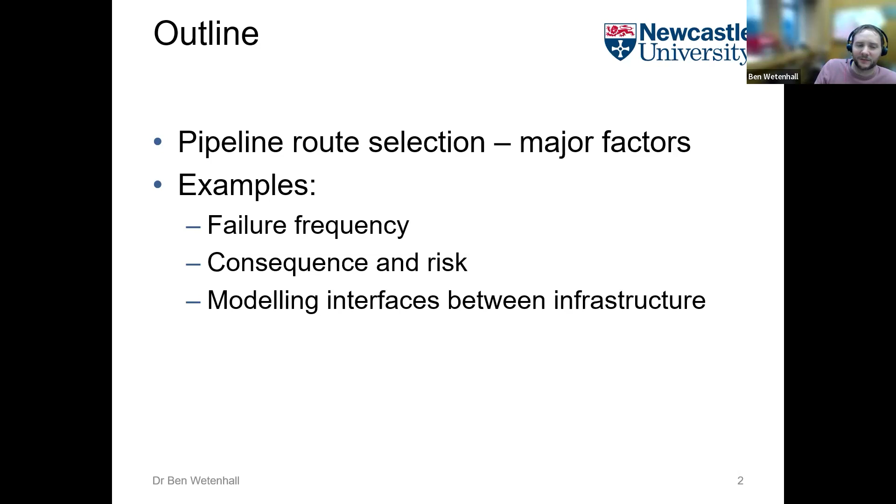Right, so I was asked to talk about spatial considerations of hydrogen and carbon dioxide pipelines. And my interpretation of that is basically, where do you put your pipeline? How do you route your pipeline? So I'm going to talk about a few things. I'm going to talk in general a little bit about how you choose a pipeline route, how you select your pipeline route. I'm going to talk about some of the major factors that you need to think about. And then I'm going to give some examples of some of our work that goes into pipeline route selection. So I'm going to talk a little bit about failure frequency of pipelines, a bit about risk and consequence, trying to prevent things going wrong. And then I'm going to talk about something that's been hinted about already, about interfaces between infrastructure - how do we model those and how do we include them? And lastly, I'm going to end with what I think are the challenges and the opportunities in this area.

Okay, so how do we choose a pipeline route? What are the major factors? Well, these are some of the major factors that go into overall pipeline system design. So you need to know where your supply and demand points are - where your hydrogen is being produced, where your CO2 is being produced, where your hydrogen is required, where your CO2 store is, for example. And you've got to include build-up points as well. So maybe you're collecting hydrogen en route on the way, maybe you need to store it on the way, maybe you need to store your CO2 partly along the way.

Another major important thing is what the fluid is and your fluid properties. So maybe you're dealing with 100% pure hydrogen, maybe you're dealing with 100% pure CO2. A lot of the times you're not, and this has a major effect on the fluid properties. You're dealing with different phases - you may be in the gaseous phase, you may be in the liquid phase - and different conditions as well, so maybe you've got different flow rates, different pressures, different temperatures.

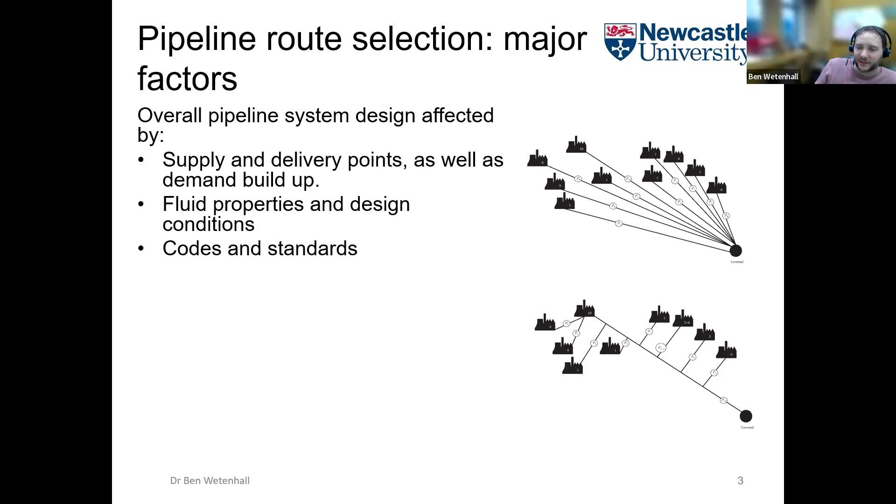When you're making a route, you need to make sure you comply with all your legal frameworks. So you need to make sure you build to code and to standard, so everything's safe and legal.

When you're building a pipeline, obviously the quickest way is just in a straight line. However, things aren't always so easy. You've got to really consider what's on the route, the topography, access. So you've got to think about things like river crossings, if you can jump in with energy corridors, mountain passes, or if you're passing close to heavily populated areas. You've got to consider all those things in a very detailed way.

Also have to consider the environmental impact on the way, which depends a lot on where you're going. It's very case specific, but you have to consider the environmental impact of building a pipeline.

You have to make sure you've considered integrity and also pipeline protection as well. So maybe you need some kind of coating of the pipeline. You maybe need to bury your pipeline, and also how you're going to manage risk as well.

And last but not least, economics. So a lot of things go into the cost of this. The major cost of a pipeline is generally the capital cost, mostly made up of the pipeline material and the installation. However, you've also got to include your facilities along the way, so things like compressors or pumps.

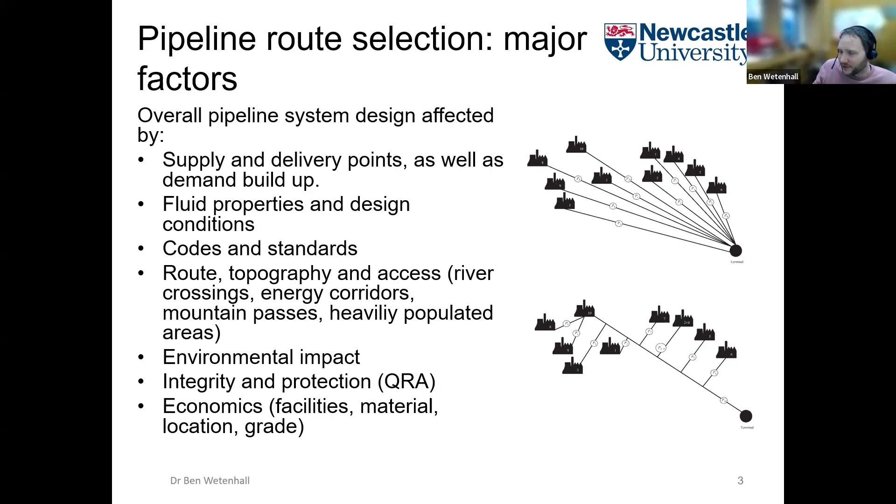So I'm going to talk about some examples of what you need to include in this, the kind of models. My first example, I'm going to talk about failure frequency, and I'm going to talk about carbon dioxide pipelines because that's what I've been working on mostly.

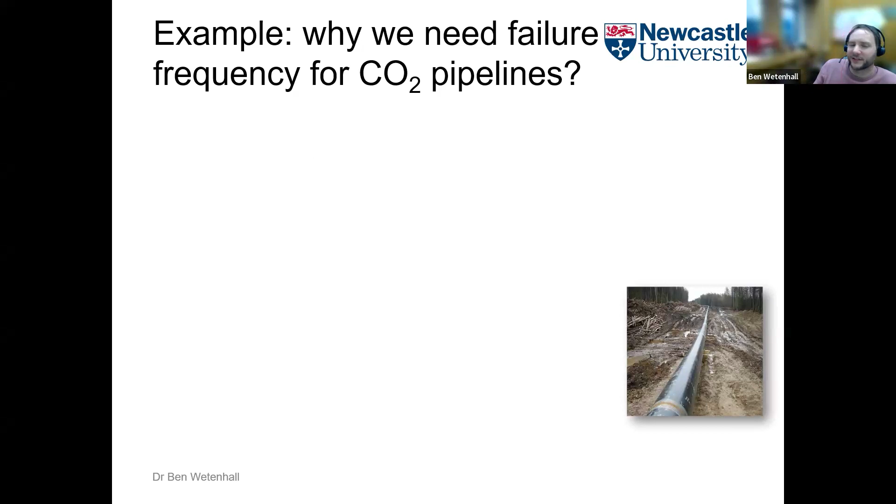So first of all, why do we need to consider failure frequency for carbon dioxide pipelines? Well, carbon dioxide is a hazardous substance, it's toxic in high concentrations and can also be an asphyxiant. And if in the unlikely event there was an accidental release from a pipeline, you could have quite a large inventory released, and if people were there, it could cause them harm.

In the UK, the pipelines could be routed quite close to densely populated areas, just because we are quite a densely populated country. And we need to understand the risk. So to get the risk, we need to know how likely we are to get failure, which is where the failure frequency comes in. And we also need to know the consequence of failure as well.

CO2 is quite different to natural gas. Natural gas is explosive, it's flammable. CO2 isn't explosive or flammable. The risk considerations are quite different for CO2 pipelines when compared to natural gas or even hydrogen pipelines. So you need to consider them quite differently.

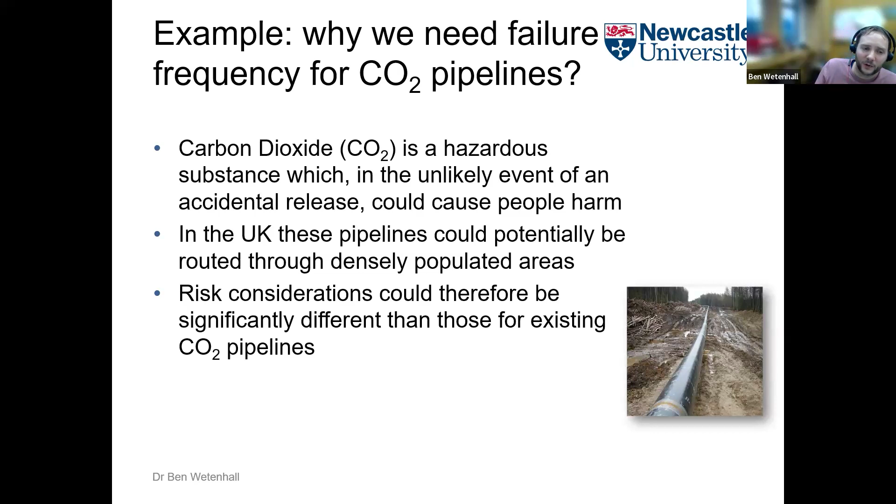And you're going to need a QRA, a quantitative risk assessment approach. So as part of your QRA, you're going to need to know your failure frequency. So we focused on looking at what's called third-party failure frequency, which is the most common for oil and gas pipelines in the UK.

What does third-party mean? Well, that means that something other than the operator comes and hits your pipeline. So it could be a farmer digging in a field, for example. So something other than the operator is the third party, and this is quite a common method of failure for pipelines.

There are failure frequency models that exist in industry, and there's no reason why these can't be used for carbon dioxide or hydrogen pipelines too. They're just pipelines, right? Pipelines are pipeline. So how do these models work? They use semi-empirical failure equations, and they use historical damage data about previous accidents as well.

Now, what about CO2 pipelines? The thing about CO2 pipelines is they're most efficient to transport in what's called the dense phase, so a dense liquid. And this typically means that you're going to need high wall thickness pipe, so you're going to need quite thick pipe.

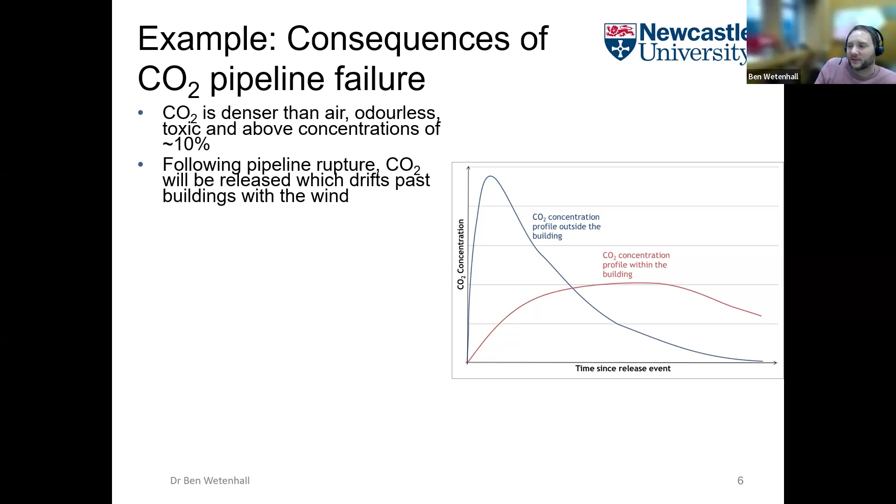So one of our projects was looking at how CO2 could pass from outside into a building. How much risk exposure would there be to people in buildings? We need to be able to calculate CO2 concentrations in buildings as part of a QRA.

If you see this plot on the right, a cloud of CO2 can pass the building. We've got concentration against time. The blue line is the CO2 concentration outside the building. If that was constant outside, eventually the building would reach the same concentration as outside, if it was there for long enough.

In reality, the CO2 cloud is going to pass the building, but still some CO2 is going to go from outside to inside, and we need to know how much. So my blue line here is how much is outside the building, and my red line is how much passes into the building from outside.

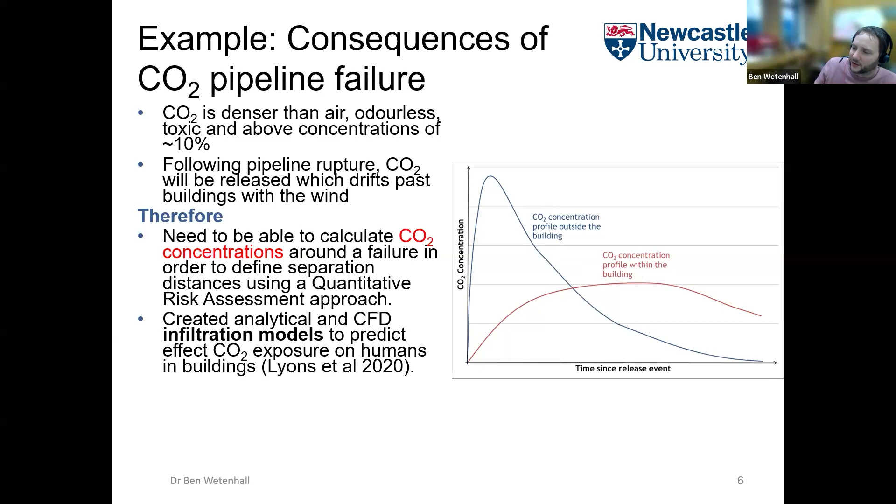So you can work out the consequences. We created two kinds of models that can tell you this: an analytical model and a CFD infiltration model, and you can use those to predict the effect of CO2 exposure on humans inside buildings. I'll put the link on the slide as well if you're interested in the publication.

How does the model work? I'll just briefly go through it. It's described in the paper, but basically it considers wind and buoyancy driven airflow. So if the wind is incident on a building, it's going to push the CO2 into the building if the CO2 is sitting outside.

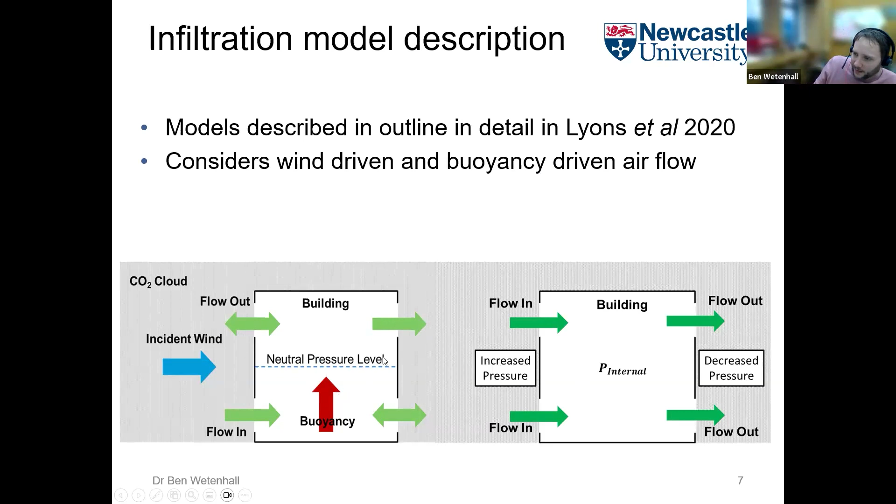Also, there's going to be flow inside the building because of buoyancy. The CO2 is quite cold in general, and that will affect the flow inside the building. Depending on the pressures and the temperatures, that will affect the flow. So we've considered that and the wind.

The model produces just a single concentration inside the building. One important thing is we needed it to be computationally efficient, because if you've got quite a long pipeline route, you're going to have to perform risk assessments in quite a large area. I think this is a theme for a lot of these geospatial considerations - because you're dealing with large areas, you need the models to be very computationally efficient.

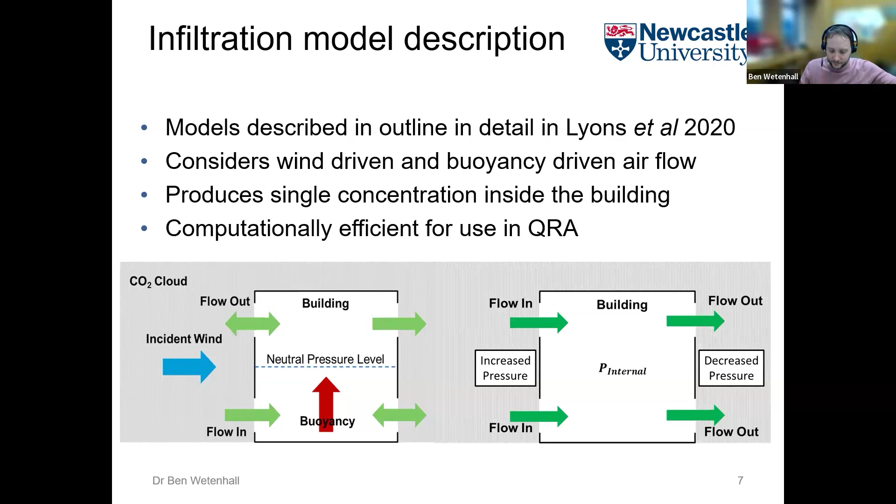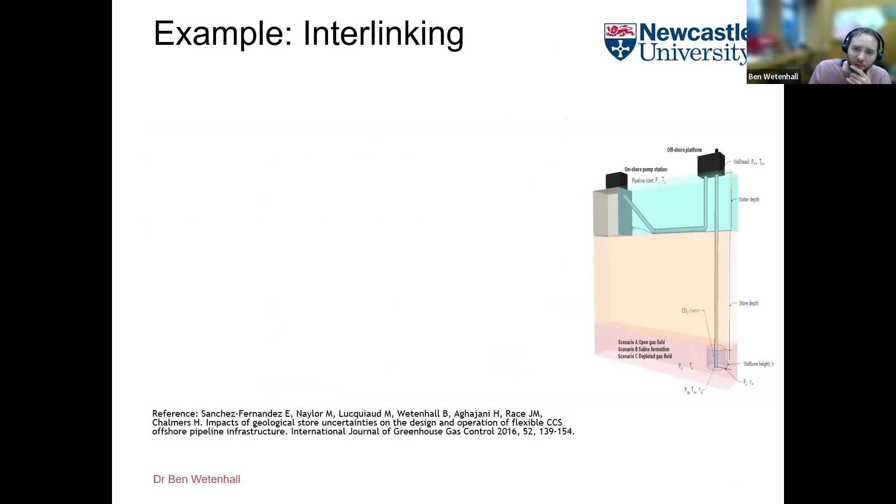Okay, another example I want to talk about is interlinking between models and interlinking between different parts in the system. When you design a system, you need it to work together with other systems. What do I mean by that? In blue hydrogen production, you've got your carbon capture and your hydrogen production, and they need to work together in harmony.

For green hydrogen, that has to work in harmony with renewable energy to produce hydrogen. So different systems have to work together, and this is going to propagate outwards into full systems, and it can be quite complicated.

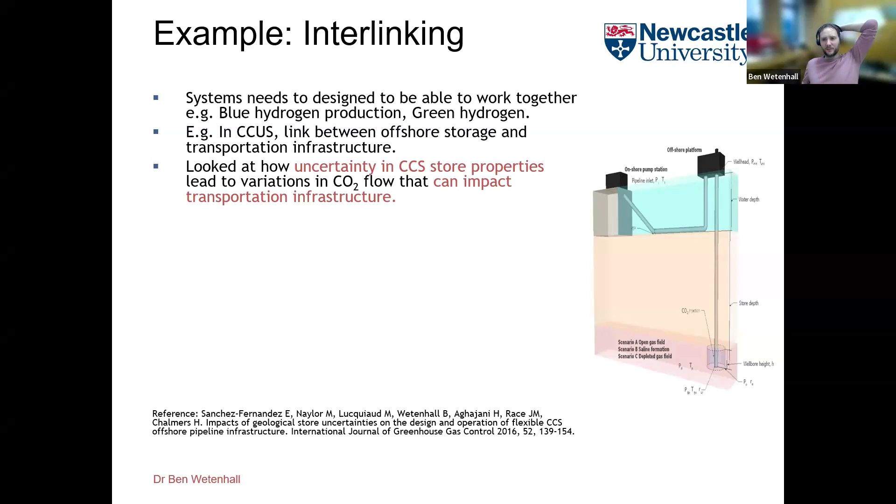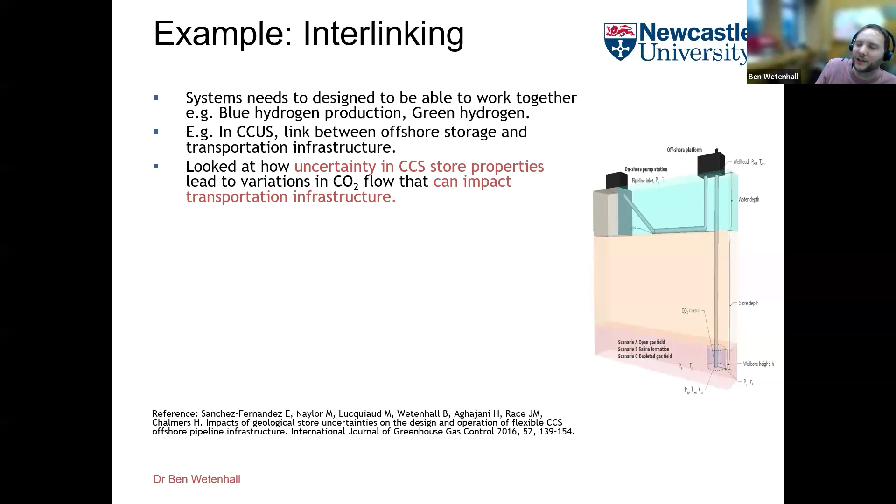One of the examples we looked at in carbon capture and storage is the link between offshore storage and pipeline infrastructure. We looked at how uncertainty in CCS store properties, things like pressure, temperature, depth, and permeability, can affect store properties, because maybe you think you know what your store is going to be like, but in reality it might be a little bit different, or a lot different. You're just doing it from your best guess.

These uncertainties can affect your transportation infrastructure, because they can lead to variations in injectivity and permeability, which means that maybe you can't have the CO2 flow that you were anticipating, which in turn affects your transportation infrastructure.

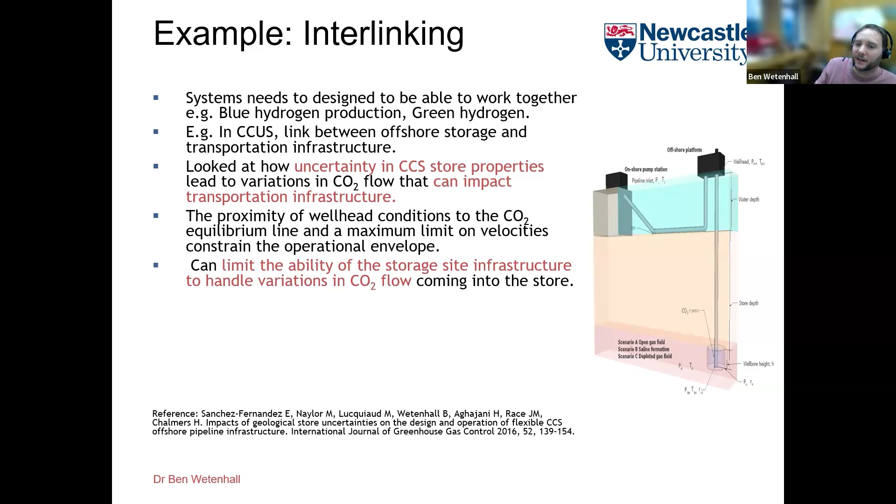Also, a lot of the time at your wellhead, the conditions that you're operating at, the pressure and temperature conditions, means that you're quite close to your equilibrium line, and also the maximum limit on velocities. And that can constrain your operating envelope as well.

So this can limit the ability of your storage site infrastructure to handle these variations coming into the store. And if the store's affected like that, if the flow of CO2 is affected like that, then that is going to affect your design of your pipeline.

Oh, sorry, I don't know why it's flicking on. It's doing it itself. My internet connection is okay, but my slides are misbehaving.

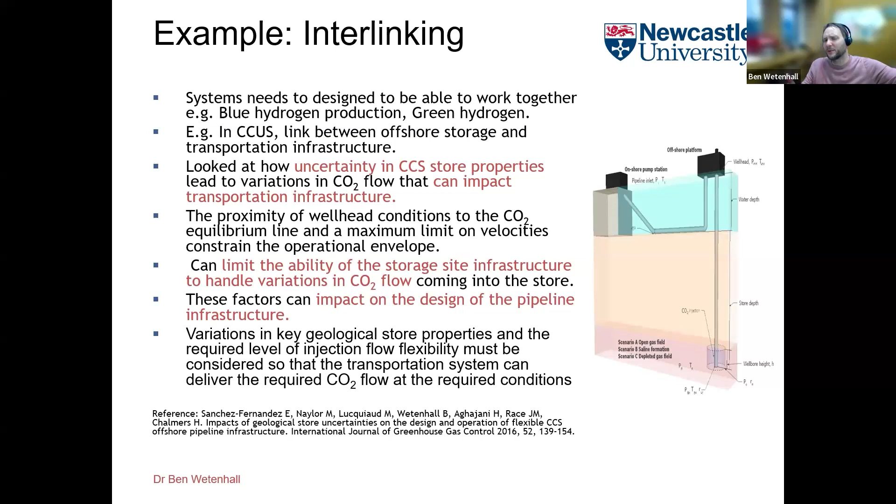So that can affect your design of pipeline. You need to include that in your design of the pipeline. Variations in store properties basically affect the level of injection that you can be and how flexible you can be. And you need to design these into your transportation system so that it can handle the CO2 flow at different conditions and probably be more flexible than you were designing to.

Another example of what I've called interlinking. You can use a pipeline to temporarily store your fluid in. It's called line packing. During line packing, the flow out of the pipeline is stopped by closing or throttling a valve downstream, while still allowing your fluid to flow into the pipeline. As a result, the fluid in the pipeline is compressed and the pipeline can be used as temporary storage.

It's called line packing. The amount of this line packing is limited by the maximum operating pressure of the pipeline as well, which you can't exceed. Line packing is used a lot in the natural gas industry, and you can imagine it allows your system to be quite flexible. So it's good to have a nice amount of line packing time.

The level of flexibility for the pipeline to act as short-term storage is very useful when you're looking at systems design. So whether it's CCUS or hydrogen, the amount of fluid that you can temporarily store in pipelines is useful for dealing with things. If you need to switch things off downline or upstream, you can use the pipeline as a temporary store.

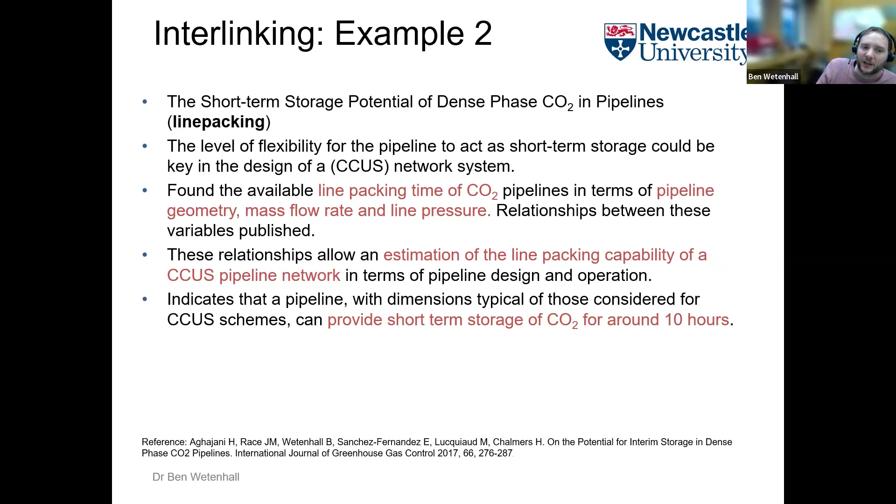So we've published relations between these variables, and the relations allow you to estimate the line packing capability of carbon dioxide pipelines. You could do the same for hydrogen in terms of your pipeline design and operation as well. For typical dense phase CO2 pipelines for carbon capture and storage schemes, pipelines can act as a store for your CO2 for about 10 hours at a time. That's what we found.

So like I was saying before, this line packing time, you can use it as short-term storage in the network, full systems. And you should think about that when you're designing your network as well, because it can really help how your system works together, including when you're reusing infrastructure as well.

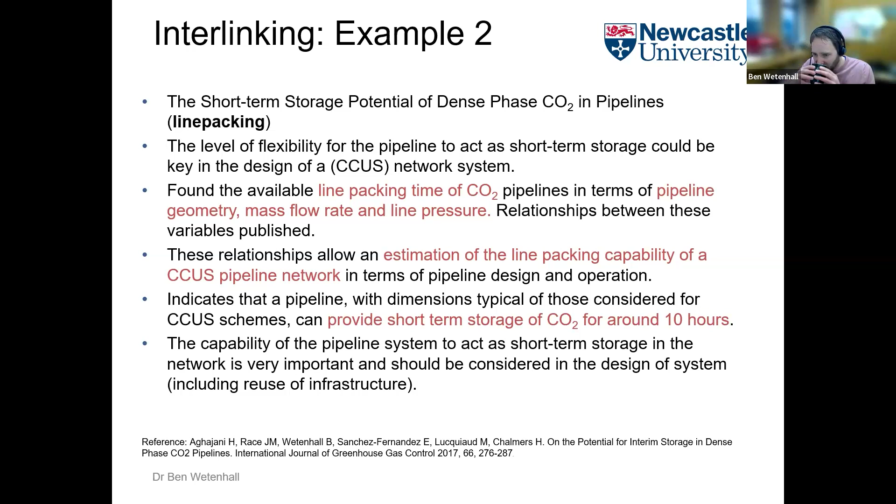Okay, so lastly, I just wanted to talk quickly about challenges and opportunities in the area.

So when you look at your pipeline route, so when you look at your spatial considerations for hydrogen or CO2 pipelines, whatever, it's essential so that you get an optimized design, so that you get a safe design, that you minimize environmental impact and enhance overall efficiency, and you make the best economic case that you can.

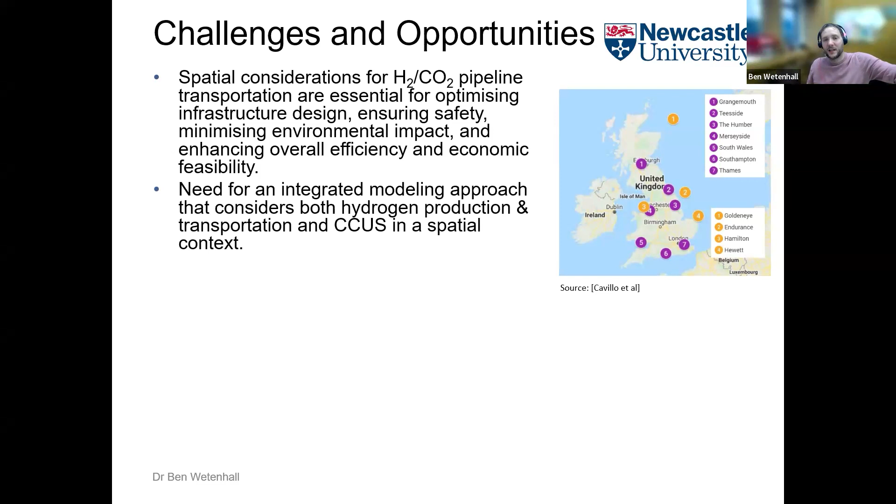You need to think about integrated modeling because these systems will work together and the effects will propagate outwards into the full system. So you need an integrated approach that considers both hydrogen production and transportation, as well as carbon capture and storage in a spatial context.

Consider the whole system and how systems work together. So, for instance, if you've got green hydrogen production, you also need to consider integration with renewable energy. You need to consider what's going to be available in terms of infrastructure and water resources, for example. So lots of different things to think about, but you need to think about how everything can work together to get the best design.

When you're designing quite a large amount of infrastructure that's complex, you generally need your models to be quite computationally efficient, because you can't wait forever for your design. They need to be quite quick.

I had to put AI in because it's very cool. But anyway, what I was thinking about for this - when you're routing a pipeline, a lot of it is looking traditionally at maps, looking at where your river crossings are, where your mountains are, how is it best to avoid them, is it better to go further from densely populated areas? So a lot of data goes in.

to making these routes, and a lot of detailed work, and there probably is potential for using AI there as some kind of quicker and smarter way of doing pipeline routing. So I definitely think that's an opportunity for the future.

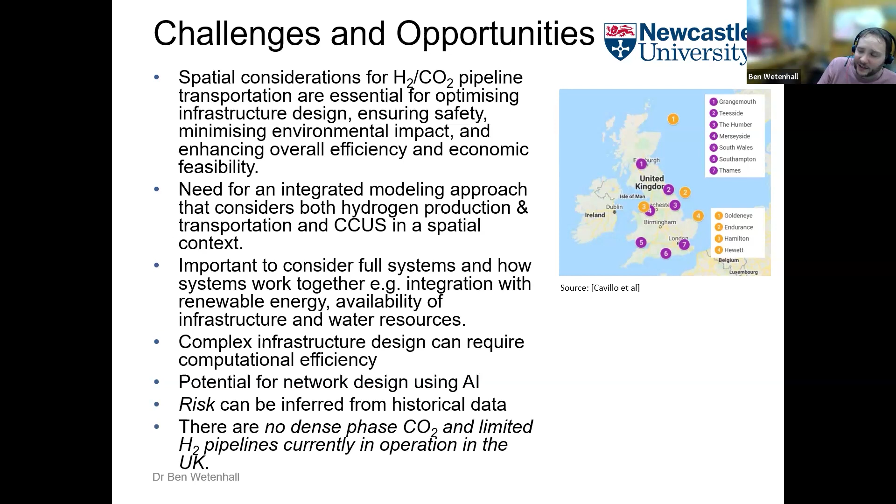Risk, well, risk is generally inferred from historical data. The thing is, there are no dense phase CO2 pipelines running in the UK, and there's very limited hydrogen pipelines. So getting that risk assessment is quite difficult as well. So you need to think about how that's best done.

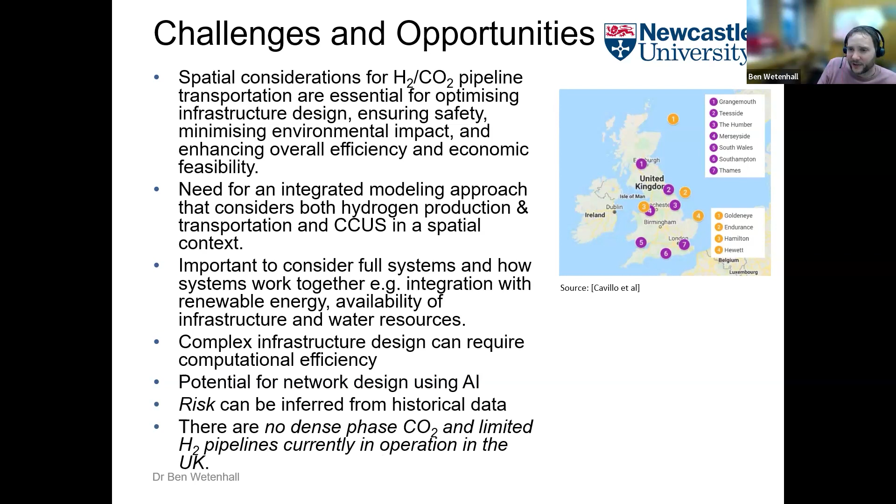And that's everything for me. Thank you.

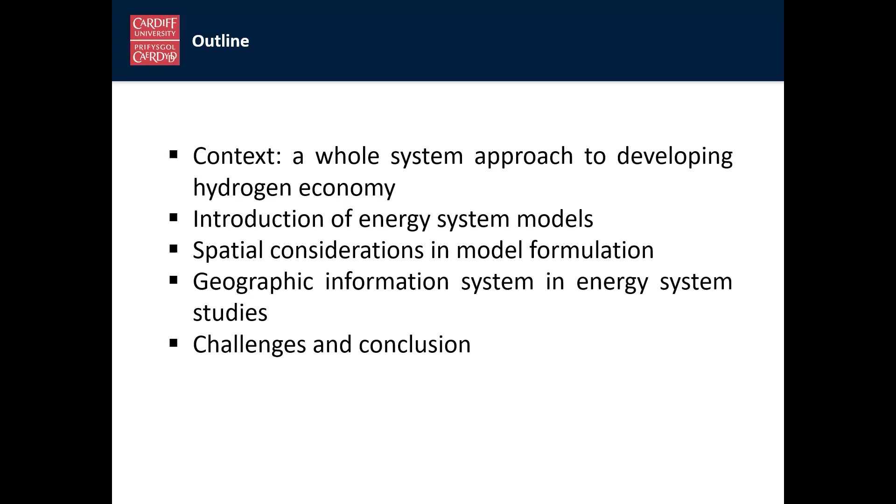So, outline for this presentation - I'm not really sure how many audience members come from the field of energy system models, so I'm going to give a little bit of context. Then there will be an introduction about energy system models and spatial considerations. So why do we need energy system models to study hydrogen?

This can be thought about in two parts. From the technical aspect, hydrogen itself interacts with other sectors through different hydrogen technologies. For example, there are water electrolyzers connecting electricity and hydrogen. There are also different hydrogen-powered vehicles and trains, maritime applications, and also applications in aviation to connect hydrogen with the transport sector.

So if we are thinking about hydrogen, we naturally come to think about what hydrogen is doing in other sectors as well. And from a political or strategy aspect, there is something called a whole system approach to developing hydrogen economy.

The UK hydrogen strategy released in 2021 - you can find that there is a hydrogen economy 2020s roadmap in the file, and it shows the gradual scale-up of the hydrogen economy with power sectors, industry, and heating as well.

And further, last December, a decision on the framework for the future system operator's centralized strategic network plan - this is a long name - has also put hydrogen production into the consideration of strategic planning, and hydrogen transportation and storage will also be considered after 2026.

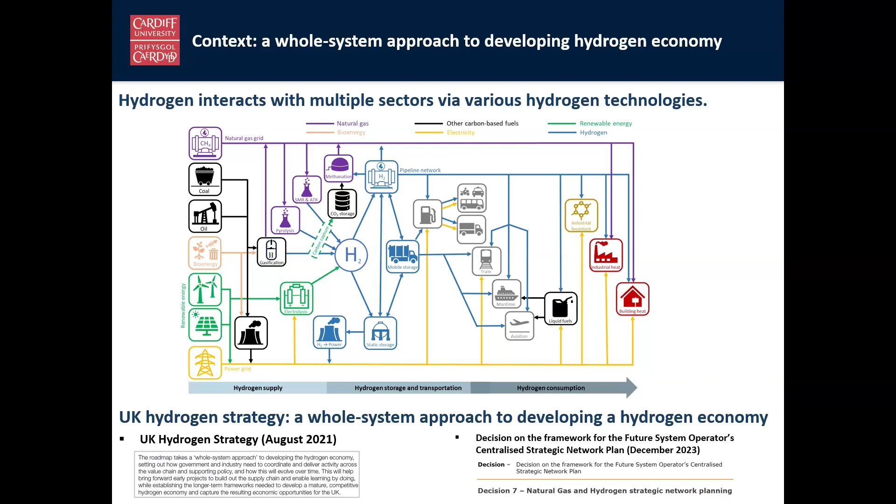So something about energy system models. When we try to study energy system models or hydrogen's role in energy system models, we need some tools to give us insights, understanding, calculations, and analysis, and that is what energy system models are here for. Energy system models, in my understanding, are different types of mathematical models that can describe the operation, physical constraints, and technical limitations of each component inside the energy systems, and also reflect the interactions between different sectors.

So the elements or components can include energy sources, conversion, storage facilities, transportation and distribution networks, energy consumers, etc. However, there are also different inputs and outputs.

These can be very different according to the different research questions or study objects of these energy system models. But the most popular ones include energy supply and demand, technical, economic, environmental factors of performance of technologies, and also social and environmental implications, as well as development plans, system design, and operation schedule, etc.

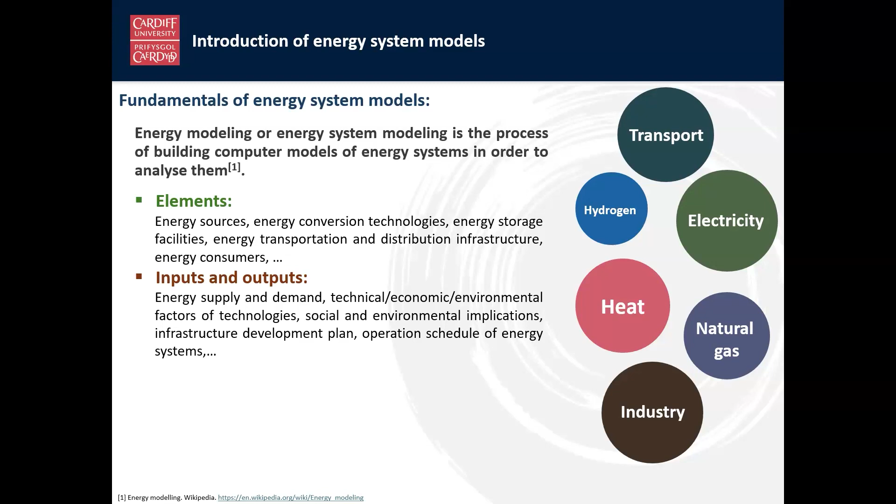Sometimes, for example, energy supply or the capacity of a hydrogen electrolyzer plant can be something already known as a data input in some of the models, and sometimes they are something we don't know and we want to figure out in the energy system models. These all depend on the research questions we are looking into.

So about the questions, there are a lot of questions out there. I think we can roughly classify them as two types. One is planning or designing, that is to plan how the infrastructure would be constructed or expanded, or investment decision making. And another one is to do the evaluation.

It's more about we already know the design of the energy system and we want to know how this energy system or different energy technologies, for example hydrogen technologies, will operate in this kind of system model setups. And then we can do further analysis based on these results.

And what kind of answers correspond to these two types of questions? For planning, of course, we can know the optimal design. For example, we can have the most economic plan to deploy different energy assets, and also the best investment strategy decision making.

And for evaluation, there will be an optimal schedule or dispatch of different components inside the energy system, and therefore we can know the revenue, the profit, the cost, and the technical performance or environmental performance of the whole system or individual components. And these are all solutions coming from energy models that can be used to support further analysis and inform decision makers.

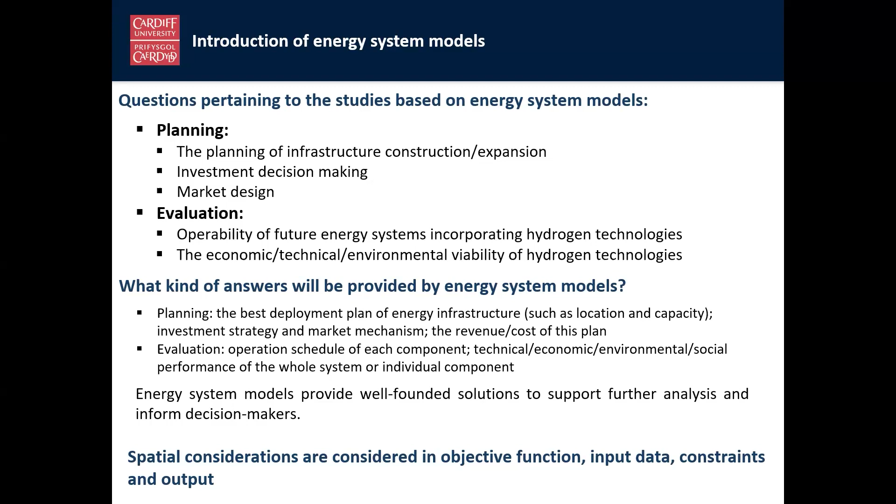As the hydrogen economy development stage in different countries, as well as the national strategy, are different, of course the input, the model formulation, and all of that stuff might be different because of the different geographical coverage.

And another thing is that in our literature review, we are investigating the larger scale energy system models. And in reality, there are different scales. There might be national, regional, international ones. There may also be local level or community level energy system models. And different scales usually require different spatial features in the input data and model formulation.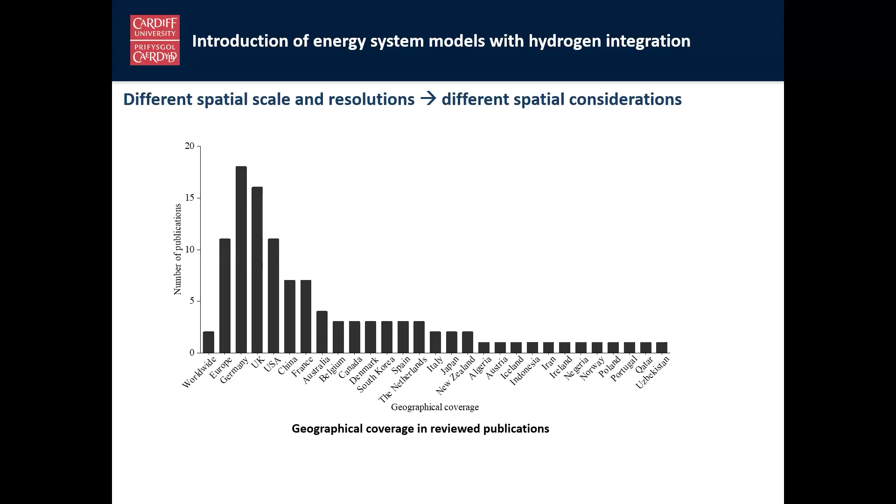And another thing is that in energy system models, usually there might be different sectors and hydrogen technologies that have been included in the models, and different hydrogen technologies will lead to different spatial considerations in the model formulations. For example, there are quite many publications that specifically investigated the role of electrolyzers in the integrated electricity and hydrogen system. So you can see that some of the publications only covered hydrogen production technology, and for sectors, they only cover hydrogen and electricity, or sometimes plus natural gas.

But for example, no heating sector is involved. So therefore, it is quite hard to give a very generalized conclusion about what kind of spatial considerations are there in all the energy system models. It might be easier to say that different spatial considerations are included by different hydrogen technologies.

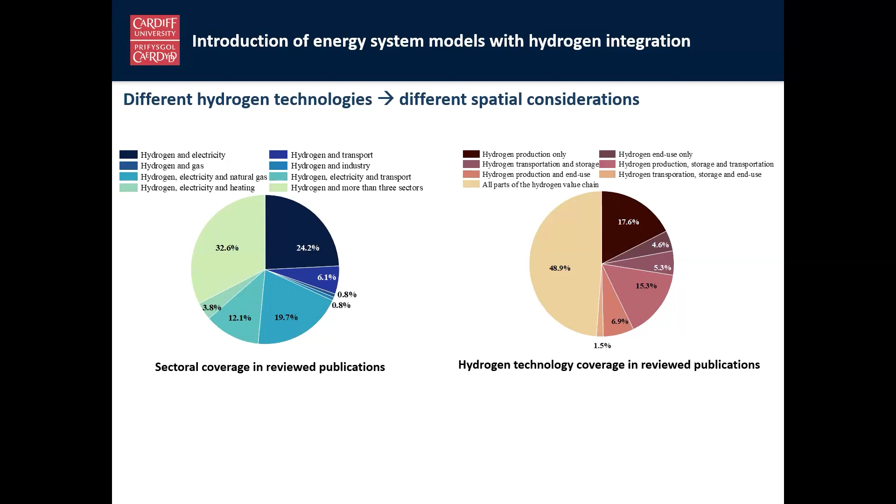So what I'm going to do here is to walk you through the model of different hydrogen technologies and how they are modeled in the energy system models and the spatial features inside the models. So first of all is hydrogen production technologies.

The most popular technology here is water electrolysis. Electrolyzers have been included in almost all types of energy system model-based studies. You can find it in smaller scale energy systems, bigger scale aggregated national scale energy systems as well, and their operation details can be modeled when looking at hourly or daily operation, and sometimes they are just represented by hydrogen supply profiles in some aggregated energy system models.

For the spatial considerations, I will talk about two parts. One is when the model is used for planning or designing purposes, and another is used for evaluation or looking into the operation of the energy system model.

In spatial considerations in planning, the location and capacity of electrolyzers will be influenced by access to water resources and electricity supply, and also distance to the hydrogen transportation or distribution network, etc. There are a lot of factors to consider. All of these can be reflected in the constraints in optimization models, or it can be regarded as some sort of data input and later on used in multi-criteria decision making, so that you can find the best location to build electrolyzer plants.

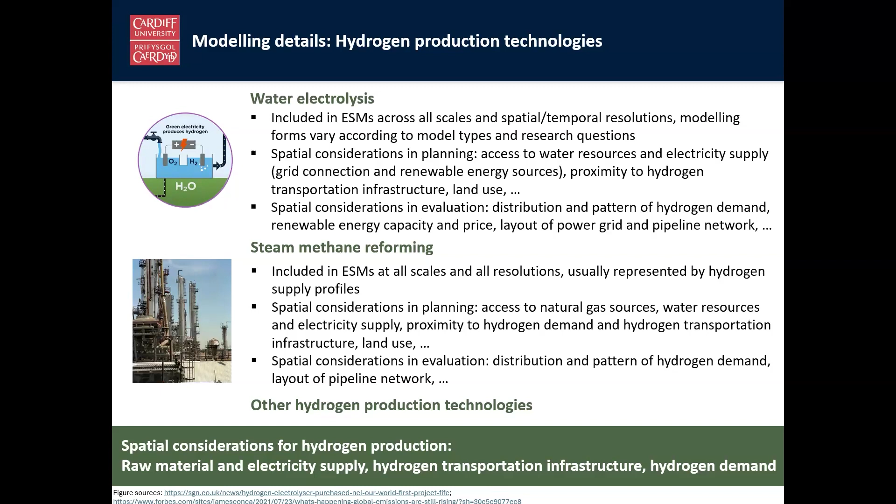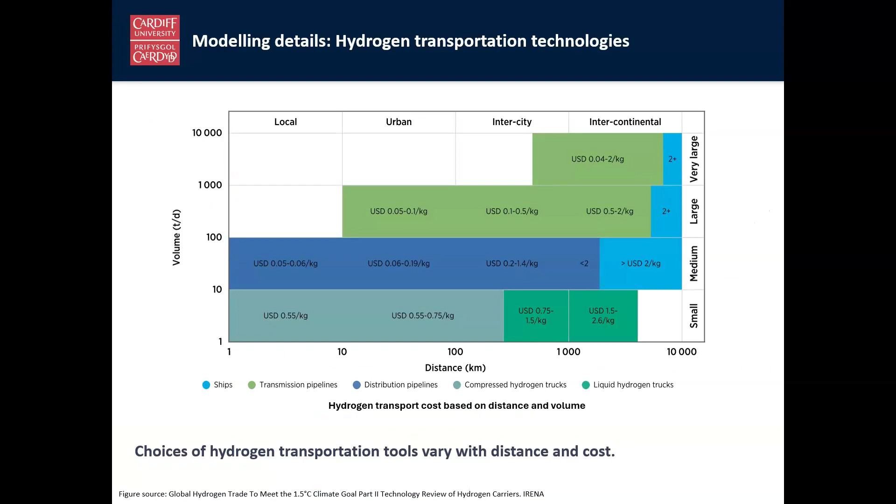For road hydrogen transportation, sometimes there is very detailed modeling about road transportation tools, for example tube trailers and tank trucks. When looking into smaller scale energy system modeling, there are actually mathematical constraints to represent how each car or truck is going around. In some other larger scale energy system models, and also hydrogen supply chain optimization models, they are sometimes represented as the hydrogen or energy flow between different nodes, with less detail.

For the spatial considerations in planning and evaluation, these are usually about the distance to the hydrogen production site, refuelling stations, and hydrogen end users, as well as the road routes and traffic conditions.

Since road hydrogen transportation connects hydrogen production and end use, sometimes the distribution of hydrogen demand or supply may vary in different areas. So that is also something to consider when you try to get an optimal plan to dispatch different hydrogen transportation tools. And for pipeline, I think Ben and Zhang have already given enough information.

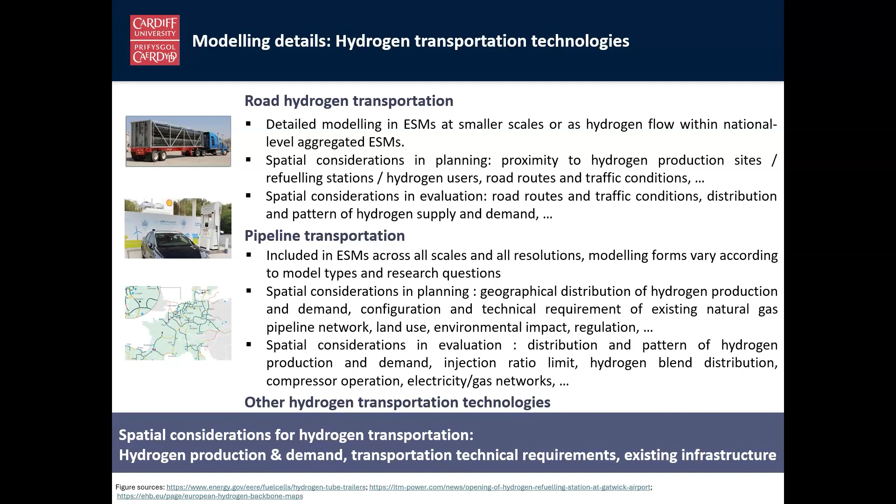And for other hydrogen transportation technologies, another one is shipping, and it's more commonly found in international trading.

And hydrogen storage technologies - I need to speed up a little bit. Tanks and vessels are very commonly seen, and one thing to think about is to connect the hydrogen production and consumption.

For underground hydrogen storage facilities, it's usually very related to the geological condition of the potential UHS sites. No matter if it's for planning or evaluation, the technical requirements or the capacity, the cushion gas requirement, etc. of underground hydrogen storage, it's very spatially featured, because it's different in each place, and that's something to be considered in the energy system models.

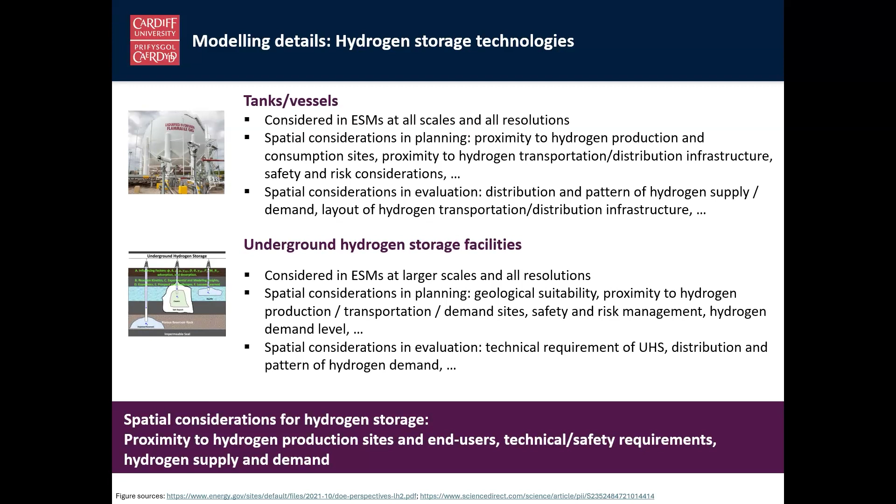And finally, hydrogen consumption in different sectors. So the hydrogen economy development is facing a chicken and egg dilemma, and the industry hopes to tackle this with coordinated development of both hydrogen supply and demand. Hydrogen demand comes from industry, transport, heating, and electricity.

For industry, the hydrogen demand is usually represented as hydrogen demand profiles, like an input data. Other things to consider about hydrogen consumption during the modeling is the level of hydrogen production and demand, and another thing to think about is the competing technologies.

For example, electric vehicles obviously outnumber hydrogen-powered road transport. And when you are thinking about doing planning for hydrogen on-road transport, you have to consider how much transport demand is satisfied by EV fleets.

And this happens the same for heating. For the heating sector, you have heat pumps and you have gas boilers. So you definitely need to consider how much is the market demand for hydrogen from the heating sector.

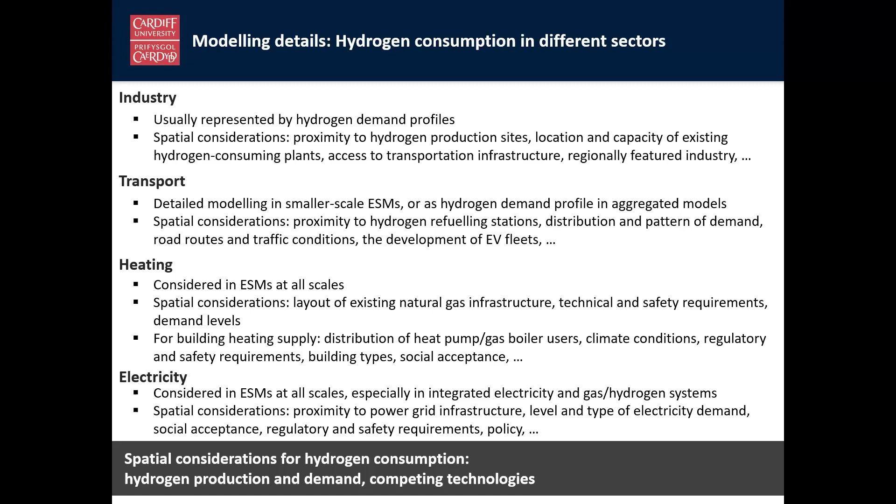Lastly, I want to talk a little bit about geographical information system. There are several publications that have been completed based on the geographical information system.

It's working as a source of data input to help the decision making in the optimal planning models.

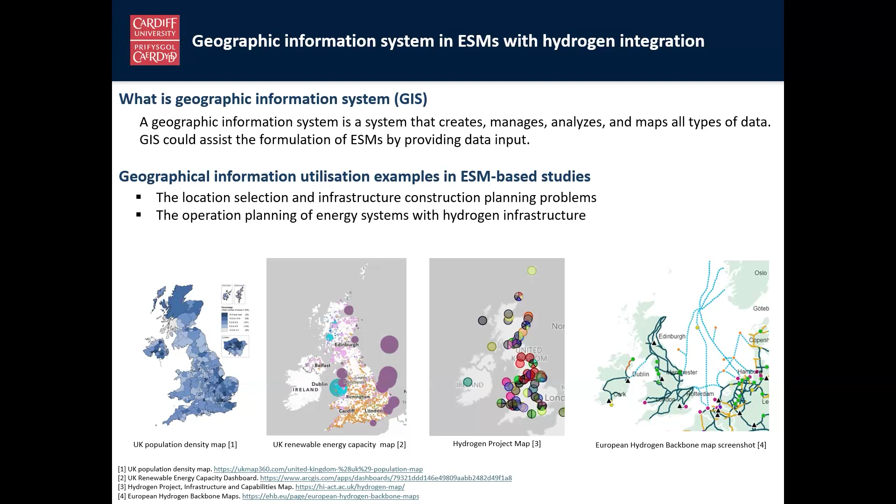For example, you use GIS to give information about the local hydrogen demand, the renewable energy resources, and the distance to different hydrogen infrastructure like storage and pipelines, and all of this can be fed into the optimization models or used in multi-criteria decision making later, so researchers can find the most suitable locations to build new plants or new infrastructure.

So, challenges and trends. There are definitely uncertainty issues in energy systems and hydrogen economy development. This comes from short-term uncertainty like demand and supply, and also from the uncertainty lying in hydrogen technology, policy, market penetration level, etc.

These uncertainty factors will be different in different areas, in different countries, so that's definitely a challenge. Secondly, we need to integrate more spatial considerations as there will be more types of hydrogen technologies in the picture.

And also when thinking about the whole energy system, there will also be other spatial considerations coming from other non-hydrogen related technologies. Third, managing the modeling complexity - just as Ben mentioned, we need to make sure the model is computationally efficient while still keeping enough detail to get an accurate result.

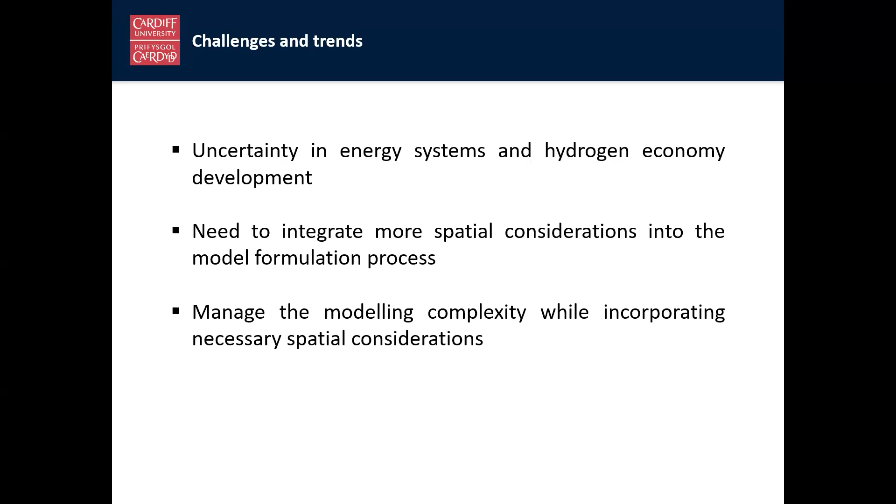So, conclusion: yes, definitely when doing energy system modeling, we need to incorporate spatial considerations, and different spatial considerations are included in the models that tackle different research questions and cover different hydrogen technologies, consider different sectors.

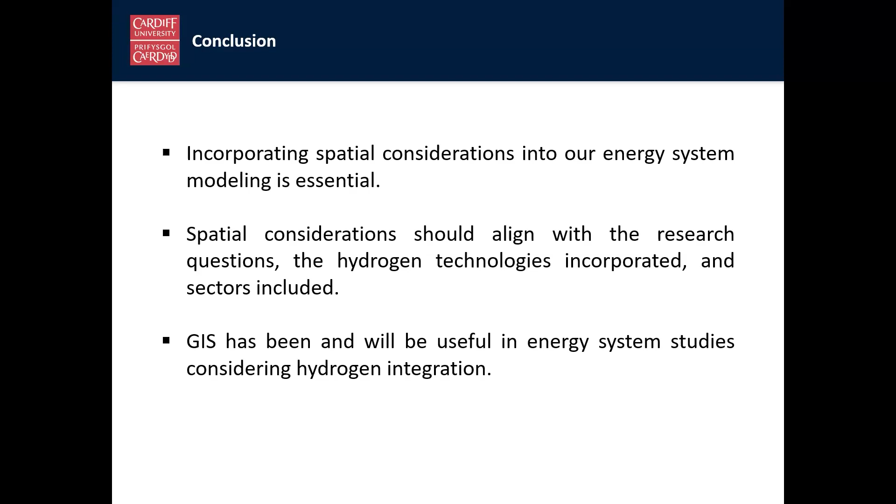So there will be different emphasis when one is doing energy system modeling with hydrogen technologies. And third, GIS has been and will be useful in energy system studies considering hydrogen integration. So basically, that's all from my side. Thank you very much.